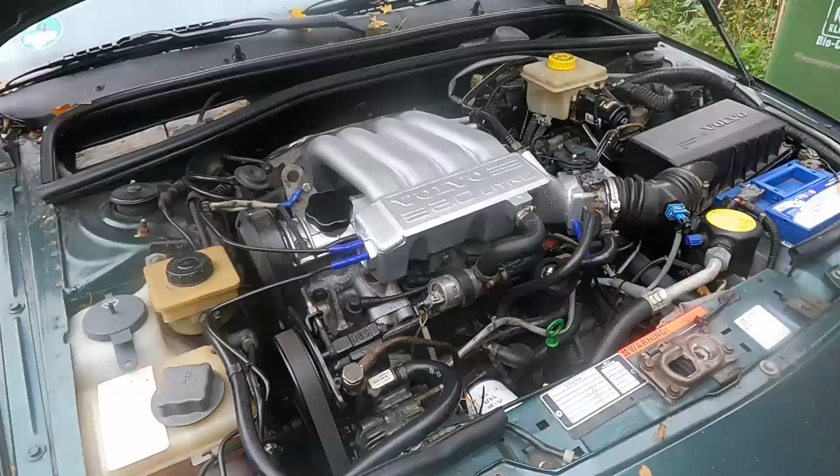Today I'm going to do two engine jobs. I've never done either of them before, so it's going to be exciting. The first is adjusting the valves and the second is replacing the timing belt. The first one I'm doing because my car sounds like a diesel, like this. And the second job I'm doing because I don't know how old the timing belt is.

Now, the previous owner had the car for 3 years and I've owned the car for 1 year. So that tells me that the timing belt is at least 4 years old and it should be replaced in 5 years. So that's what I'm going to do. During this job I'll be helped by the Haynes manual and another manual that I'm going to pick up tomorrow.

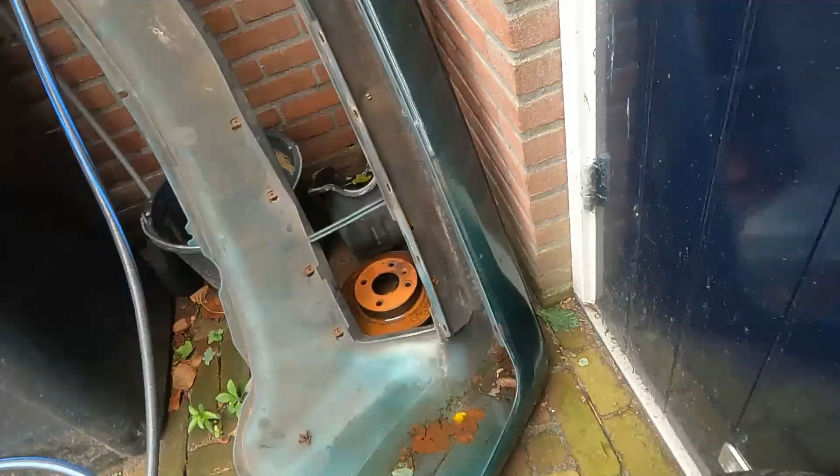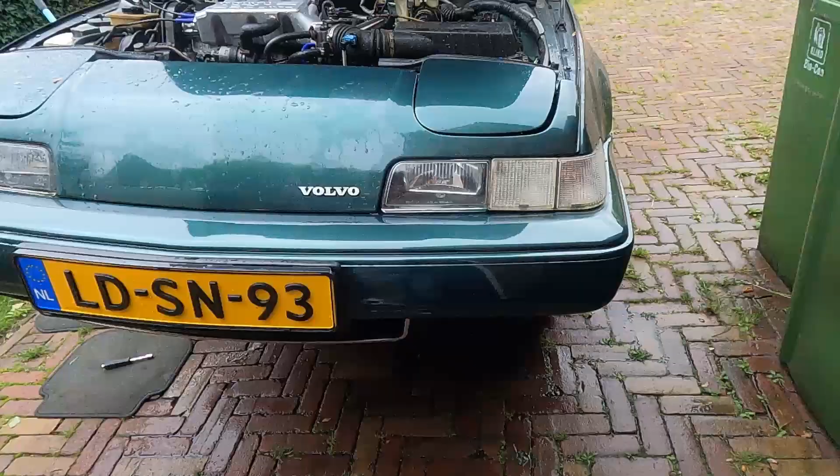One more thing I want to show you. Do you remember my old bumper, which came in the color 50 Shades of Green? Well, there it is. It's still 50 Shades of Green. You remember this damage? While being at a Volvo meeting, I purchased another bumper, second-hand, for 10 euros. I painted it myself. You see, it's not perfect, but it's a whole lot better than the other one was.

Of course, this is a DIY job, so there's still some orange peel, of course, and some things that I missed, but it cost me only about 100 euros in total. So it looks a lot better.

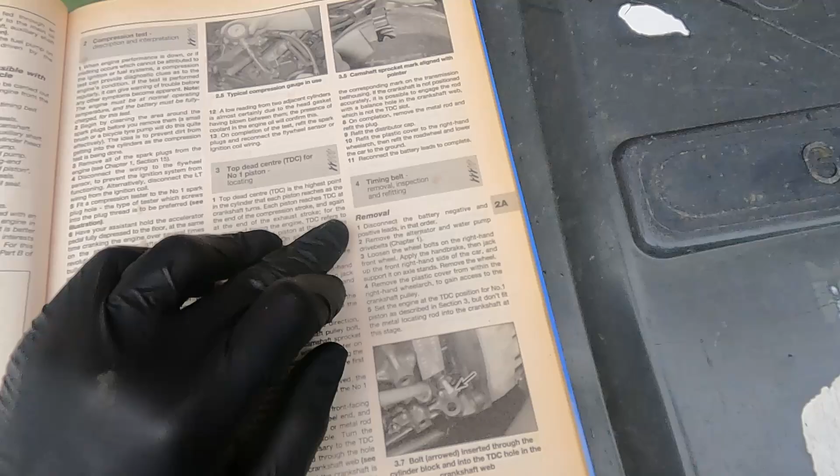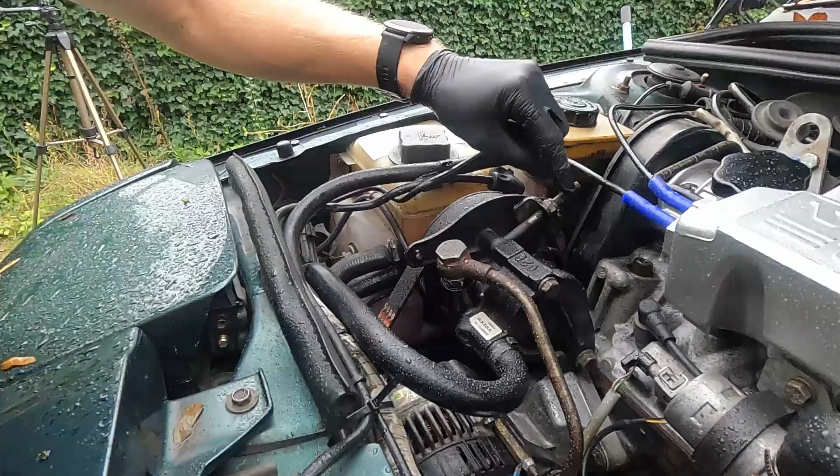So I've got the Haynes manual here. Timing belt, I'm going to start with that. Disconnect the battery, blah blah blah. Remove the alternator water pump drive belts. Yeah, I'm going to do that. And then we're going to need to put the engine in top dead center. Okay, let's first remove the belts. This belt needs to come off and we're going to loosen up this bolt and this bolt over here. Yep, there we go.

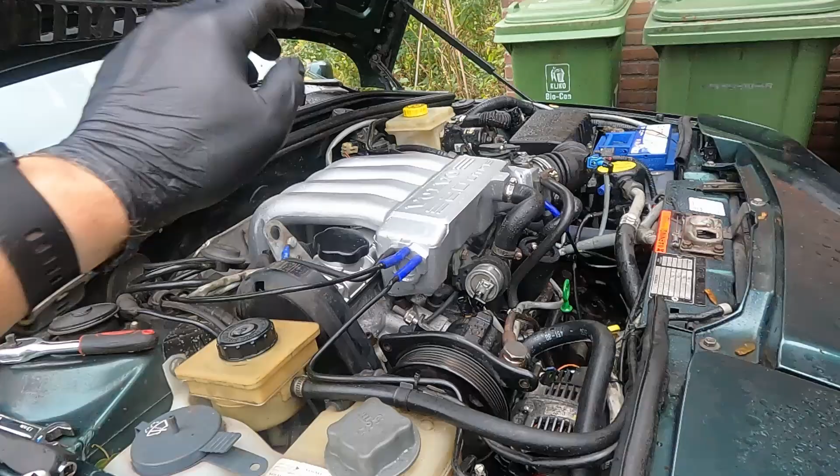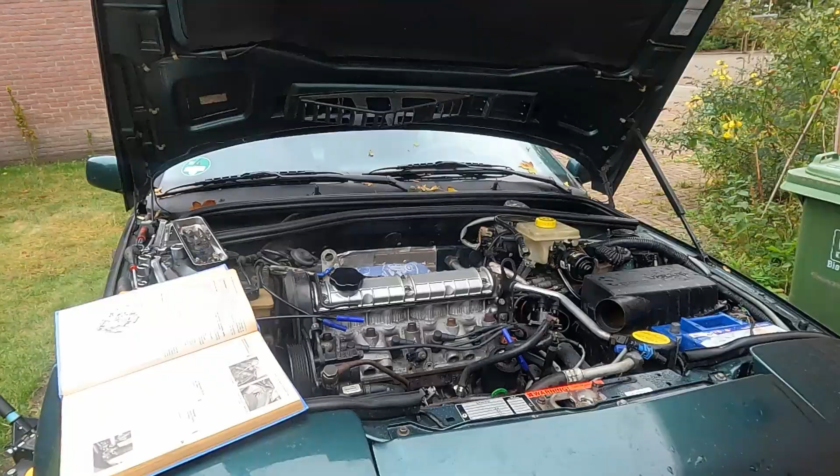I got it. Now, because I'm also going to do the valve adjustment, I'm also going to remove the intake of the engine. This is not necessary for the timing belt, but since I'm doing both jobs at the same time, I'm going to remove this. I've already got a video on that because I was painting this. It's from a while back, so if you want to know how you should do that, please check that video. I'll be back when we're going to put the engine in top dead center. And thanks to the noble art of editing, it is now off. So let's continue.

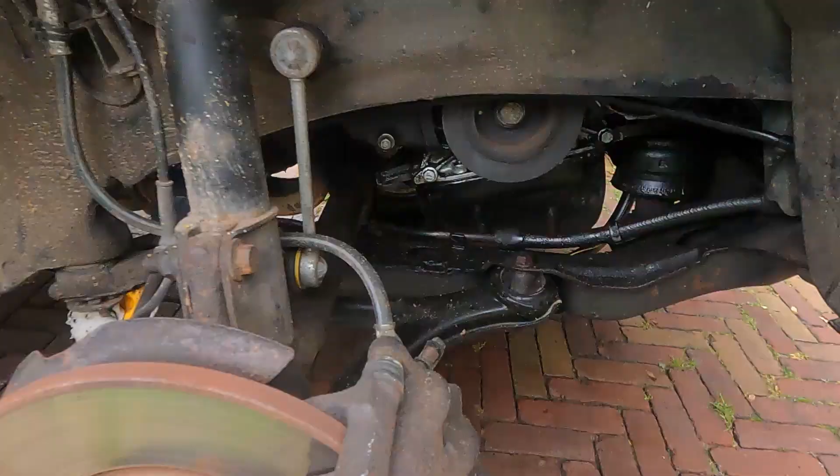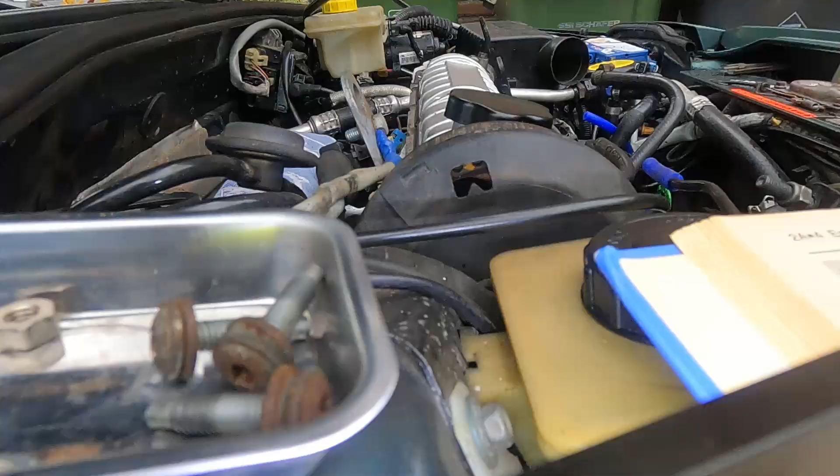Top dead center. So yeah, we need to put the engine in top dead center, which I'm going to do by turning this crankshaft pulley clockwise until those two marks here line up. Okay, there we go. You can barely see it, but the person who did this job before me, I think, or one of the persons, has made a yellow dot on it because it's indeed very hard to see. Now it's better to see, so that's indeed top dead center.

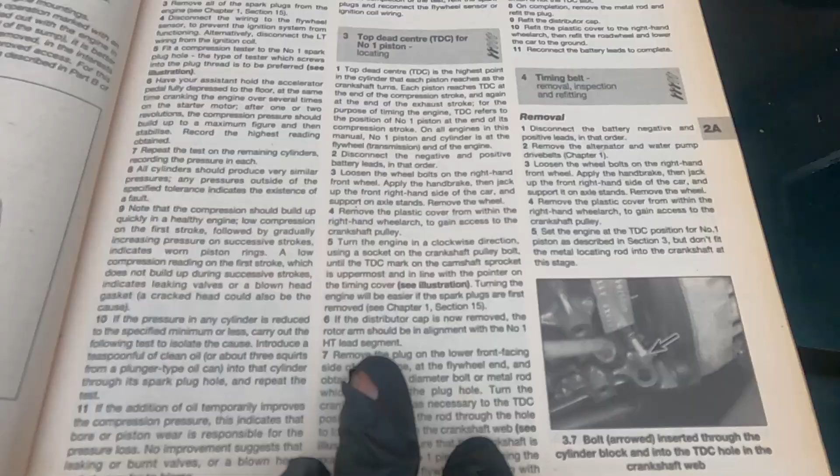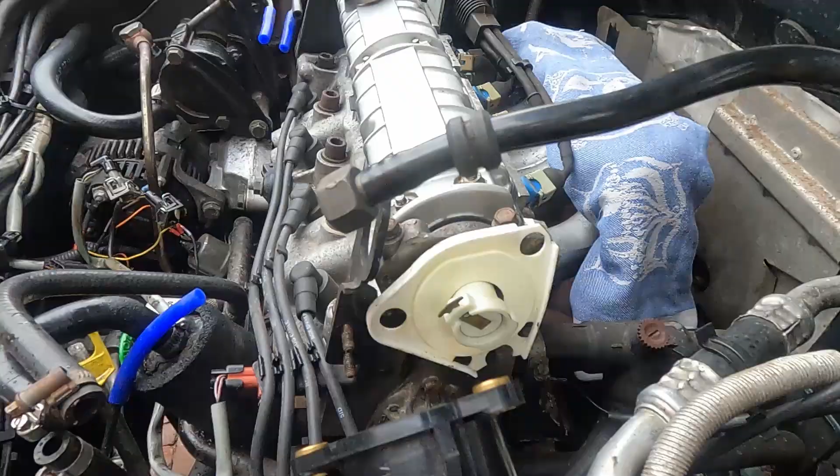Let's see, if the dizzy cap is now removed, the rotor arm should be in alignment with the number 1 HT lead segment. Dizzy cap removed. This should now be in line with the number 1 HT lead segment. So there are the marks over there, and this seems to be indeed spark plug 1 because it's on like this. This is number 1. Yeah, that's true. We need to follow the steps here now.

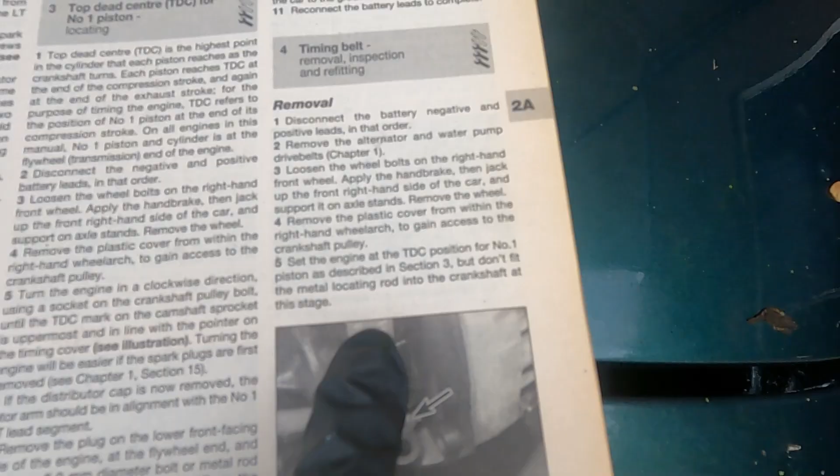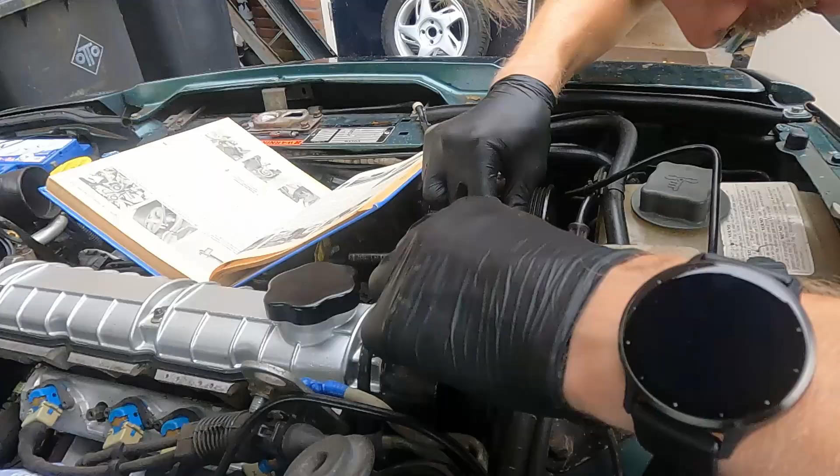Remove the plastic cover, set the engine in TDC position to number 1 piston, but don't fit the metal locating rod in the crankshaft. Okay, release the spring clip. This one is already missing, so we need to take off this cover. That's fine, we can do that. There's only a few bolts. Okay, so the bolts are out. Now we should be able to remove this cover. There we go.

Now this is the old belt, and I'm not sure how old it is. It looks fine, but I don't want to take any risks, so I'm going to remove it, of course. Looking at the pulleys over there, they are very much rusted, so I think it's time anyway. This step is done. We are still in top dead center. These two lined up, so we need to follow this dot here.

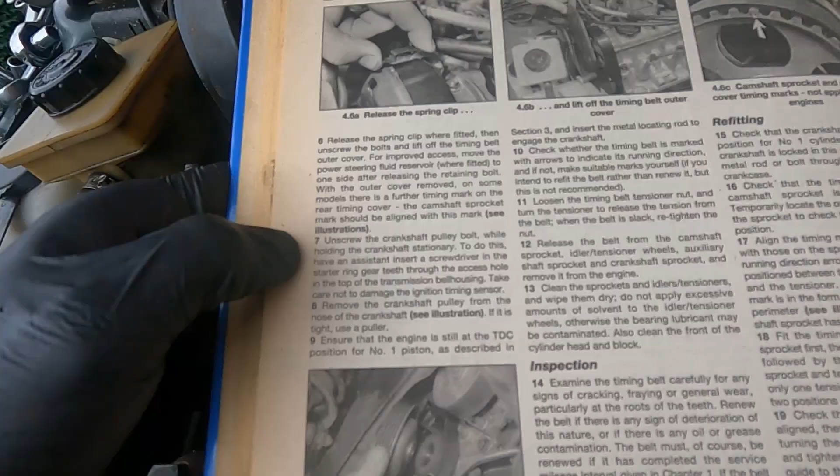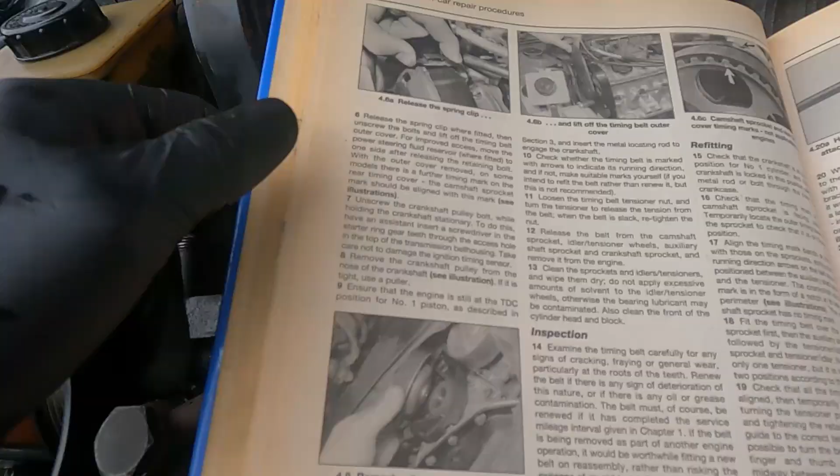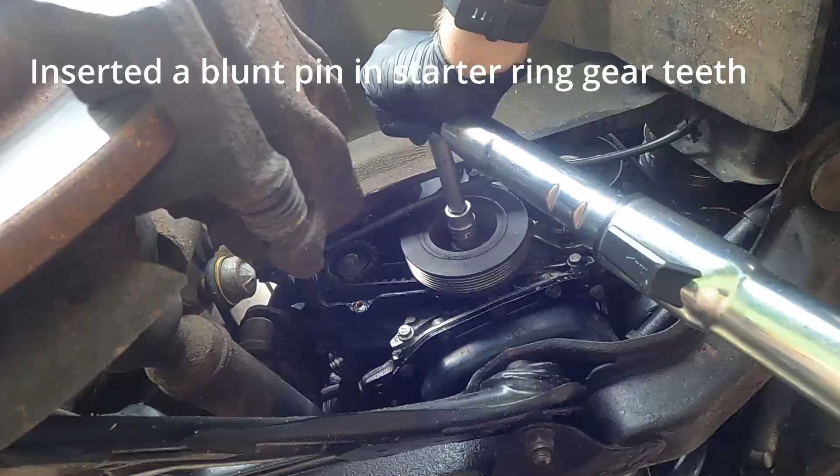Unscrew the crankshaft pulley bolt while holding the crankshaft stationary. To do this, have an assistant insert a screwdriver in the starter ring gear teeth through the access hole on the top of the transmission bell housing, but I'm on my own. What if you're on your own? I don't have a minion slash assistant right now, so yeah, I'm gonna have to find another way. Yeah, there we go.

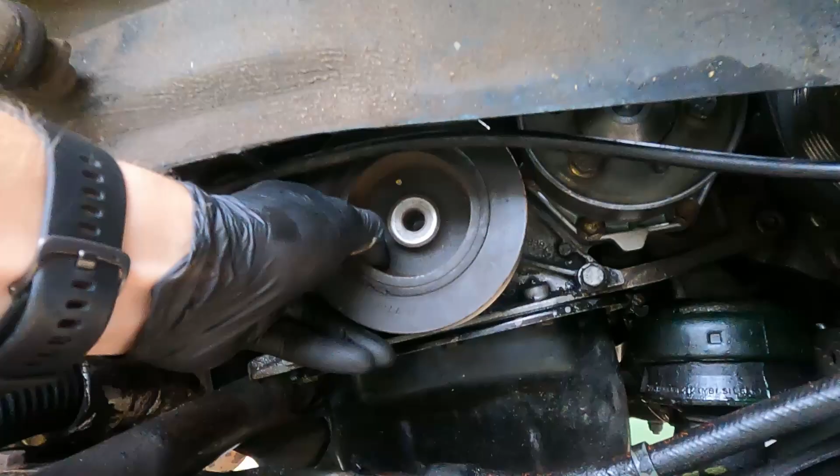And now the crankshaft pulley bolt is out, we can loosen up the crankshaft pulley itself. Now these bad boys can get pretty stuck, so maybe I'll need to have a pulley puller or something like that for it. Oh.

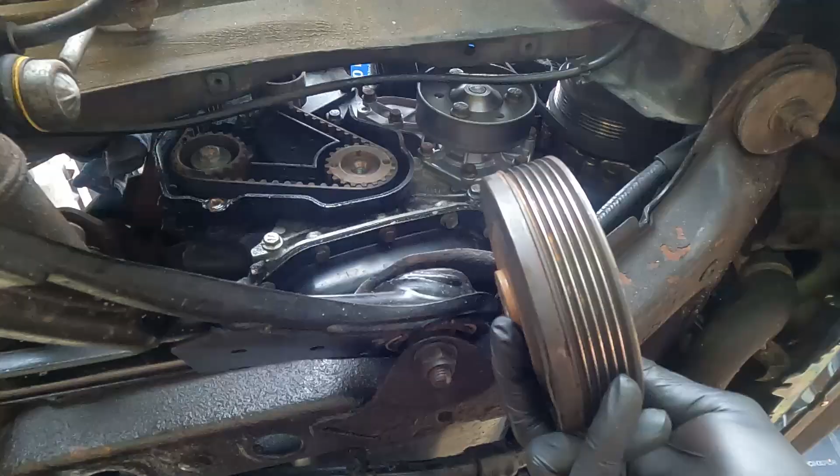It's loose. There's a little mark here, which does not correspond with anything, but we'll need it later on. I'm going to mark it just to be sure. Like so, and on the belt as well. And on this one too.

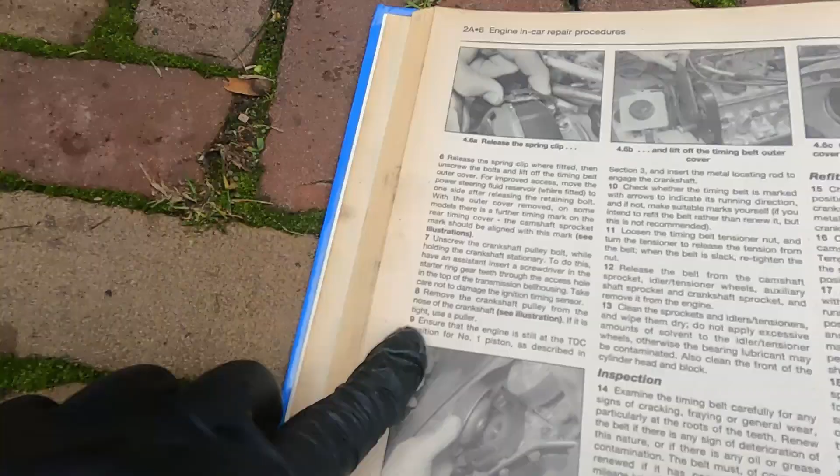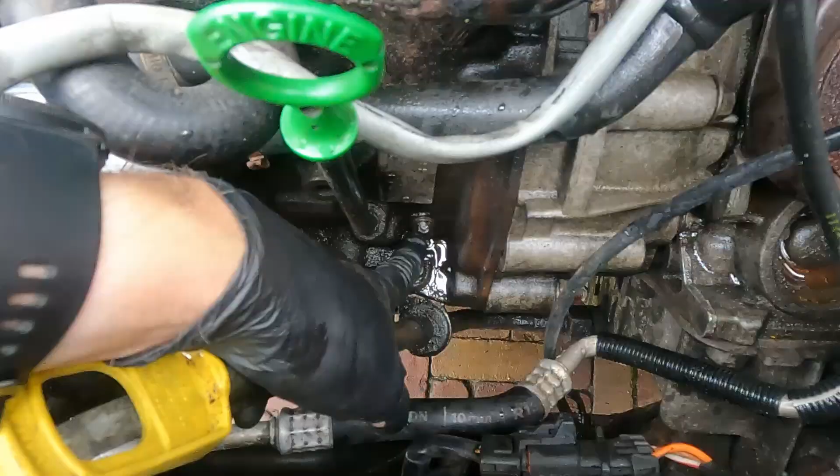Ensure that the engine is still in top dead center. Yeah, still in top dead center. And insert a metal locating rod to engage the crankshaft. In order to lock the crankshaft, we need to remove this bolt here and put a locking tool in, or an 8mm bolt. So I've got an 8mm bolt, so let's do that.

Right, it turned out to be a little bit harder, because in order to reach this bolt you need to have an E14 socket, which is the star shape, and if you have an automatic transmission, you have to remove the bolt that holds the transmission stick in place. And now we have to fill this hole with an 8mm bolt, which I have here.

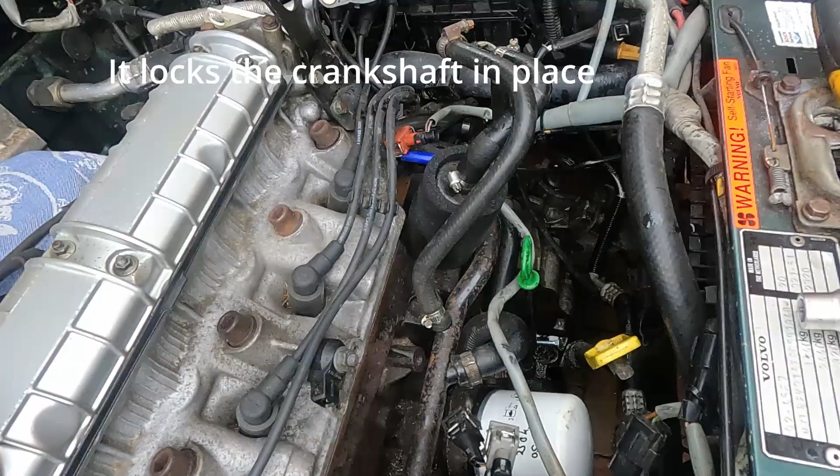We are still in top dead center, and now we have to put this thing here, and this will apparently lock the crankshaft or something. So another step done. Check whether the timing belt is marked with arrows to indicate the direction of rotation. Yeah, the timing belt is marked, but we are going to renew it, so we don't need that.

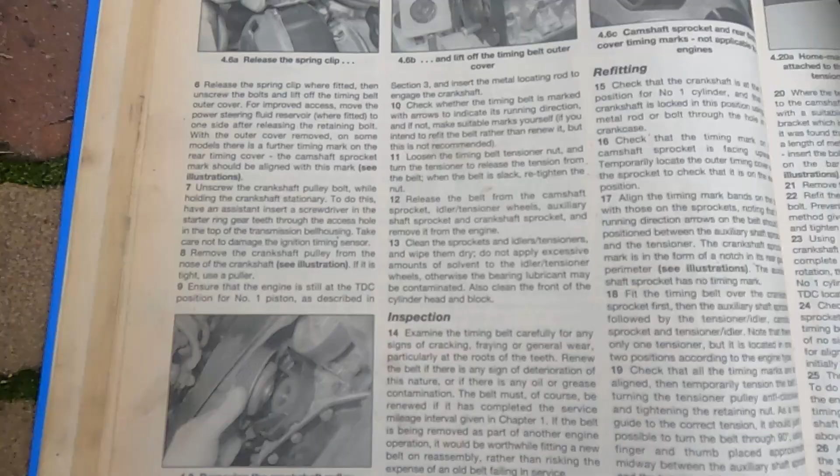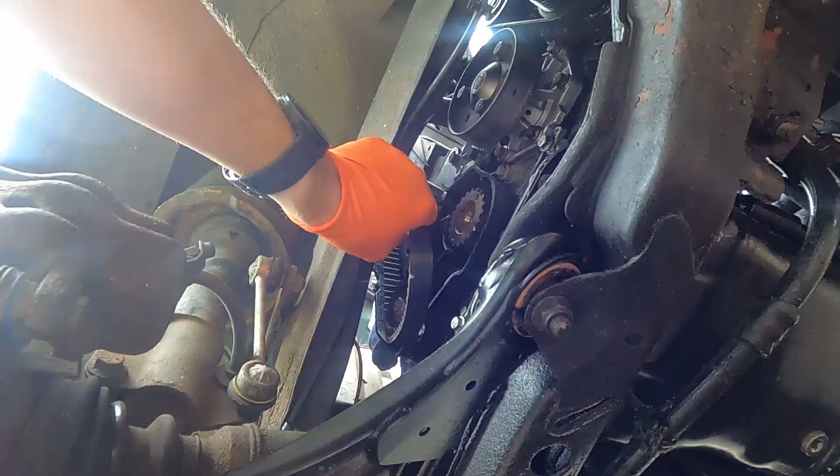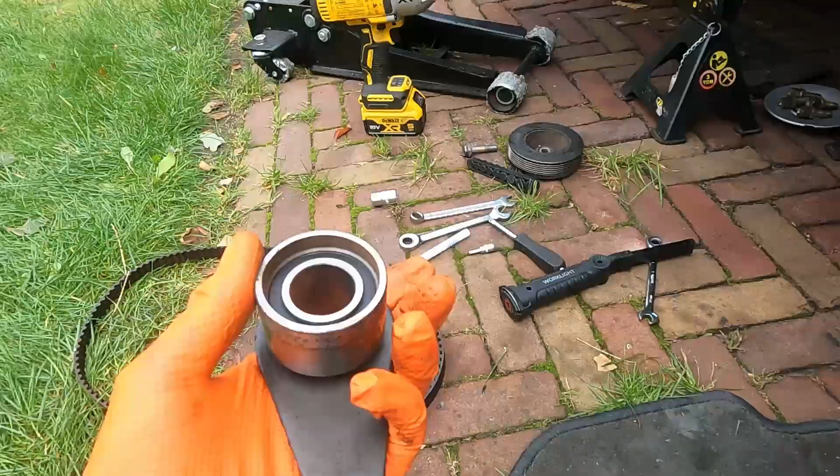Loosen the timing belt tensioner nut and turn the tensioner to release the tension from the belt. Now there's much slack on the timing belt, so we can now remove this pulley, which we're going to replace. We're going to remove the belt. Oh, there we go. That was easy. Right, and there they are. Okay, I can feel no play in it. So maybe it was good for another round, but we're going to replace it.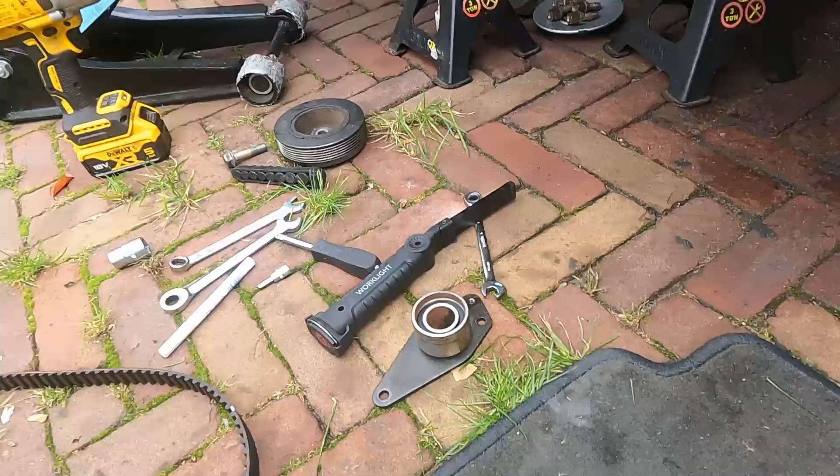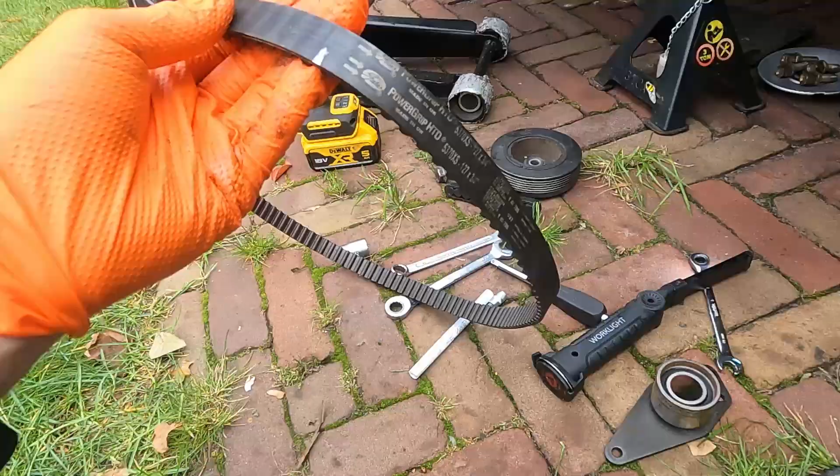Now the belt. I'm not an expert on belts, but I think it still looks quite good. Gates, it says, that's nice. I can see no damage, which tells me it's still in... No, it tells me nothing actually. It worked, and now it's going to be replaced. Now I know why this was not replaced, because no one has a 16mm wrench.

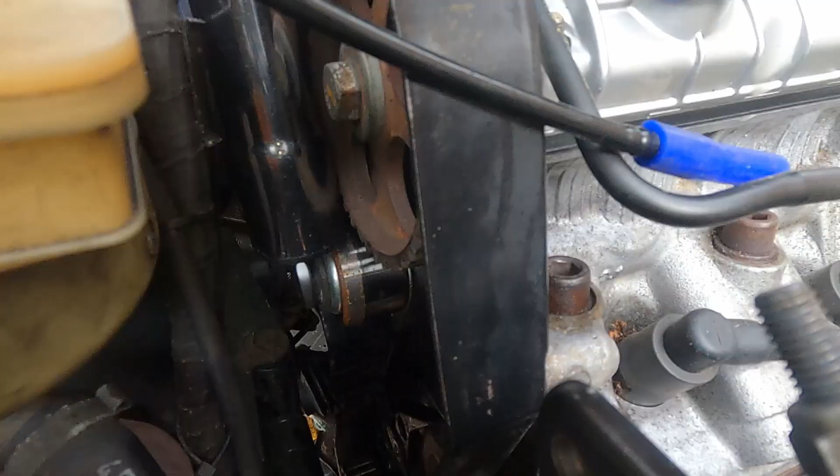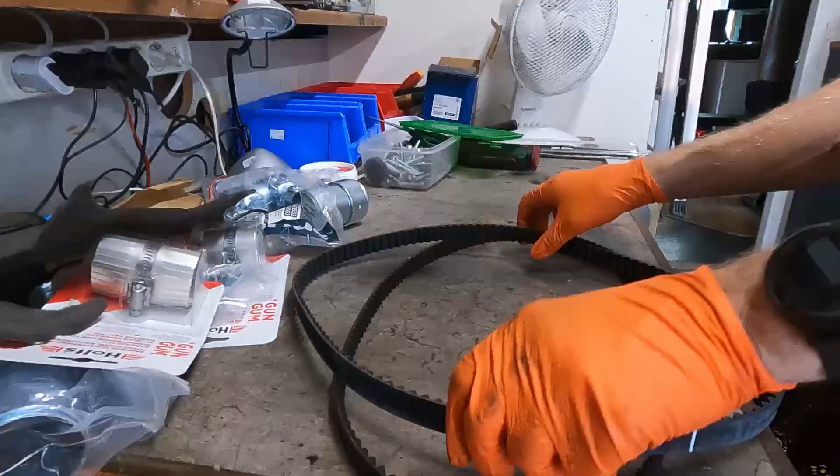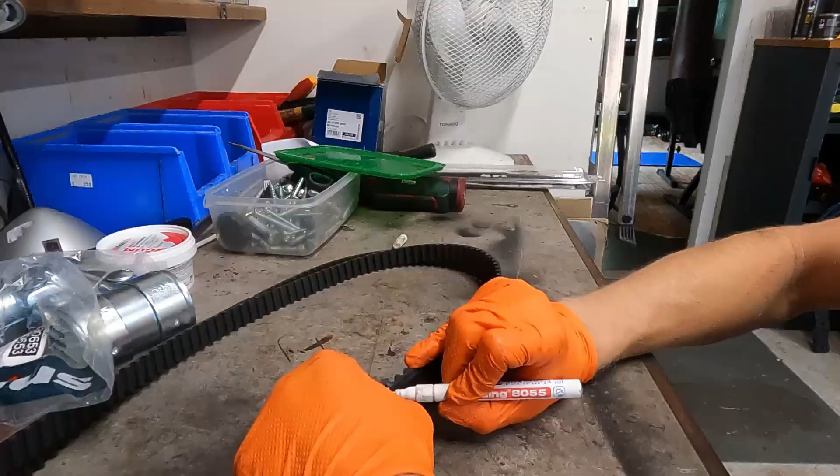And here's the new set and the new belt. Now I want to check if they're exactly the same size. Well, they seem to be. So I've made some marks myself, and I'm going to put them on the new belt as well. So there's one over here. I'm going to put it over there as well. I've put one here. Yeah, there's the other mark, the line.

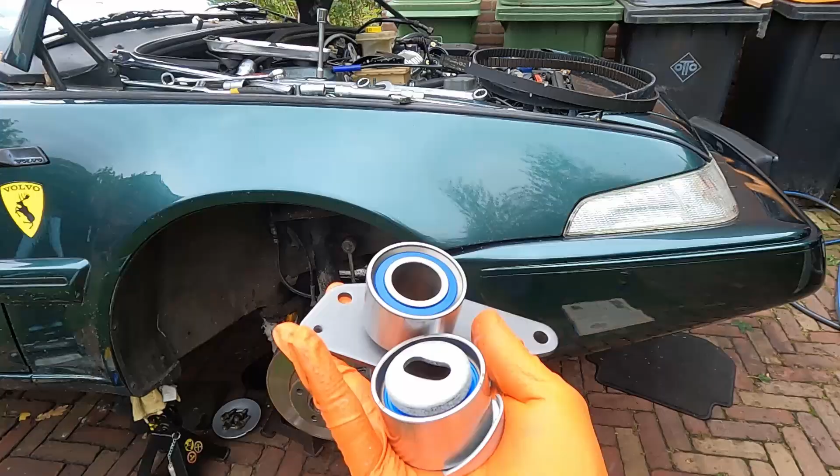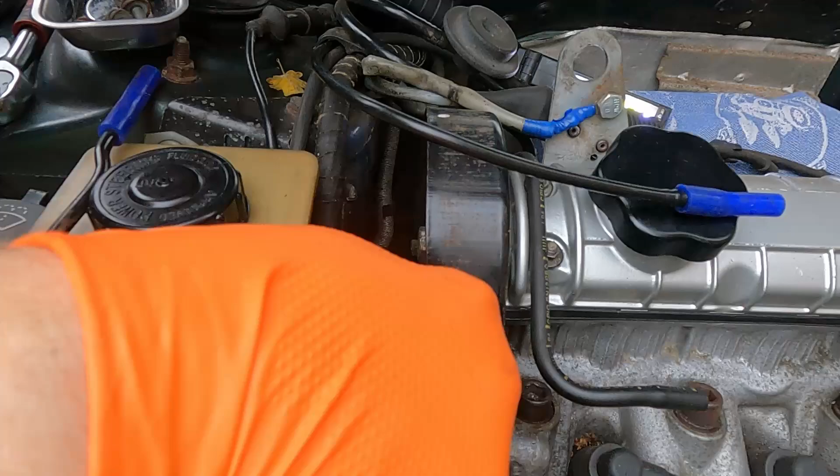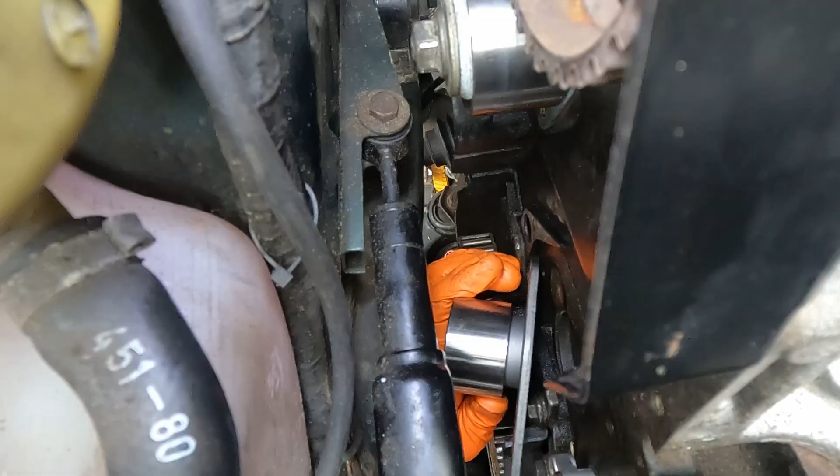Now first let's put those two new pulleys in. This was supposed to go there. Now fit this ring over it. Let's tighten that. Look at it being shiny. Now I'm putting it in from below because I think that's easier. Everything is back in place. Now let's see if we can fit the new belt.

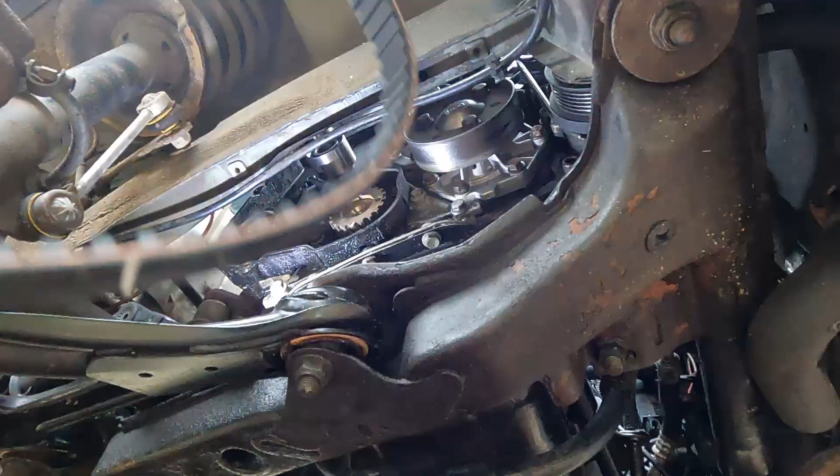Right, so I've got the new belt here. So we have to fit the crankshaft pulley first. Just going to lead the belt over there so it won't get in the way. Let's put this over here. That seems to work so far. Just one more pulley over there. Yeah, there we go. Right. Okay, check with me. That one is up there, right? All the way down. This one is aligned too.

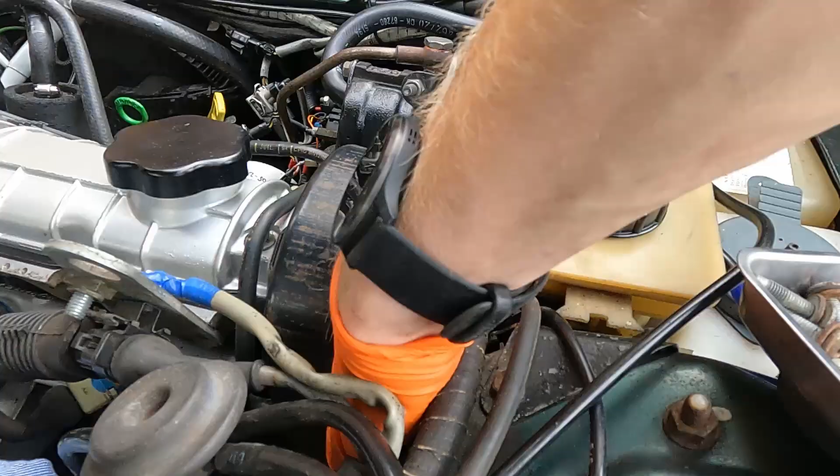Now we need to put tension on the pulley. And I'm not sure how to do that at this moment. I'm very sure that I shouldn't do it like this, but I found a long bar. And I can press the pulley like this. And then I can retighten it. There's tension on it. And now I'm trying to see if I put maybe too much tension on it or too little. I just cannot fit my thick hands in between here, so that will be very hard for me to check. I think that's it, guys.

Wrench. This should be 40 Newton meters. But again, my wrench doesn't fit in here. So just gonna do it like this. Right.

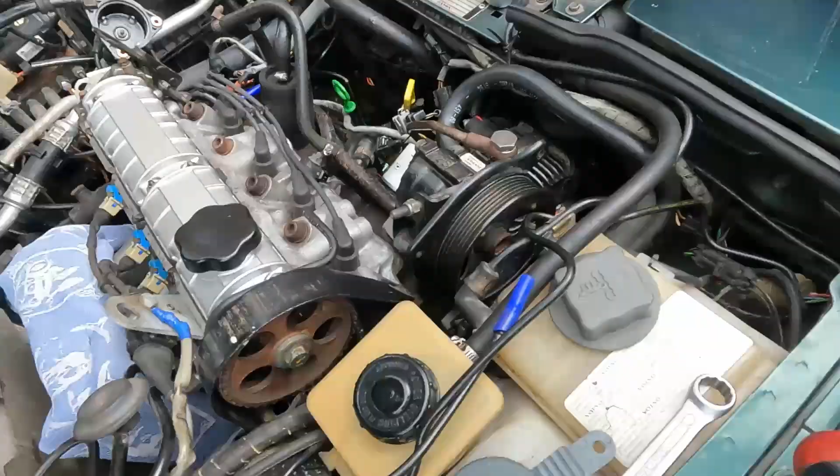So the new belt is in place, the two new pulleys are in place. Now let's give it a full revolution and see if everything still lines up. And in order to do so, we need to put back the crankshaft pulley. Now this bolt over here must go out. So I've taken the bolt out in front of the engine. Don't forget that. Now let's see if we can give it a full revolution.

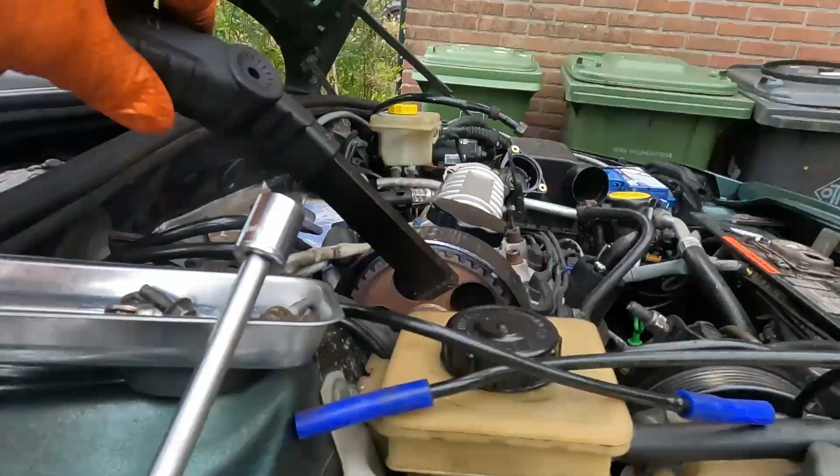Okay, the moment of truth. Am I going to hurt myself again? No. Okay, I think I know what went wrong here. A certain individual, also known as me, put multiple of these little marks on the timing belt, which is why I thought that this was top dead center, but it isn't. It's this. I should have watched that. And not this. So this is now top dead center, the camshaft, and this little mark here is also at top dead center, which tells me that it worked.

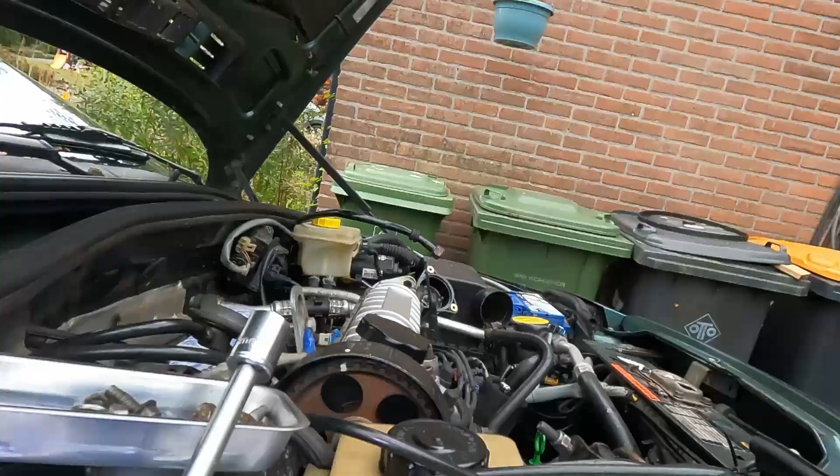I'm going to give it one more revolution because you need to do two according to the Haynes, so we're going to do that and see if everything still lines up then. A few moments later. Almost top dead center. And almost top dead center. So, okay, this went well. We can get this out of here now. Oh no, we still have to have it in here because we need to put the crankshaft pulley back.

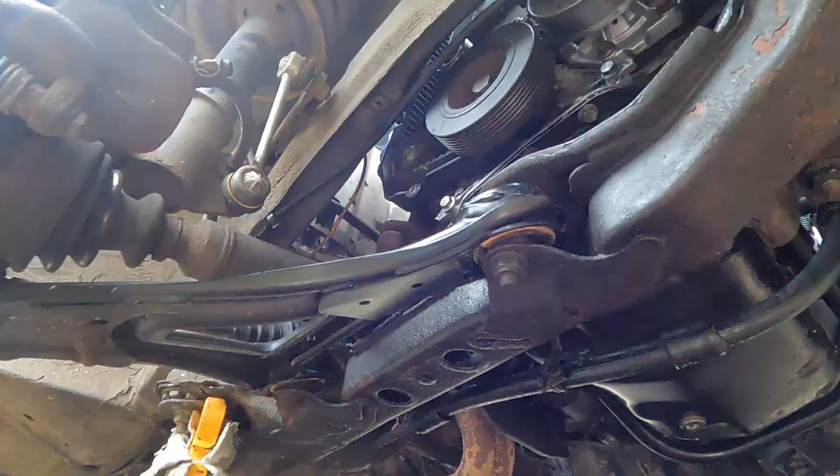Yeah, guys, I think that worked. I'm not going to be able to start up the car yet because, well, it's all in pieces. But this seems to have worked. I'm going to put it back together. Right, so the crankshaft pulley bolt should be torqued to 95 Newton meters. Yeah, there we go. Okay guys, I'm not sure if this is the end of the video or there will be another end, but this part is done. I think that concludes this video so far. Next time we're going to adjust the valves as I promised.